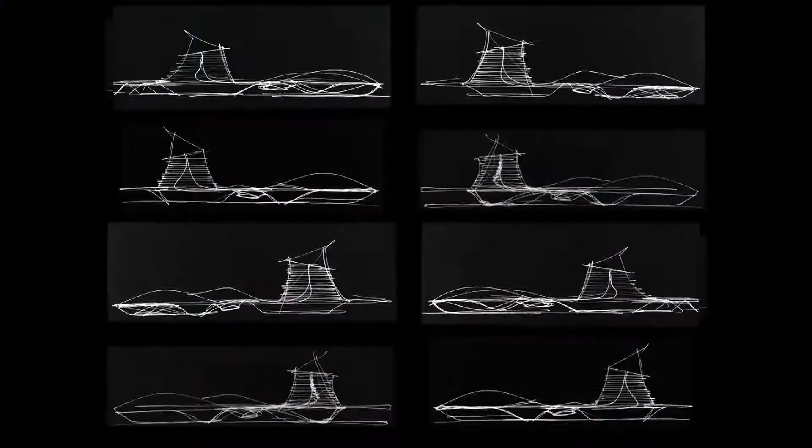The first subject here is edge making. I want to talk about the idea that in building cities we have edges, the outlying components of the city that delineate or define it. For us, projects in the office that have helped us understand and work towards producing an interesting edge condition are port terminals for cities that exist on the water.

This is a project we did in Taiwan for Keelung. The project started as these kinds of sketches for the edge of the city, and how a port terminal might be notated and terminated to produce a kind of urban condition at the very edge of the city. The building was designed to sit in strong relation to ships coming in and docking with it.

The architecture would somehow evoke the beauty, the poetry, and the power of nautical architecture in a single entity that would work in unison, musically, with the ships moving in and out of the port. The building is also a kind of celebration of urbanism at the edge of the city.

In this case, we produced a sports complex, a velodrome for cycling events and other things, so it wouldn't just be a functional building at the edge as a port, but also a public building, a spectacle building, a building of events and structures, so people could arrive and have a kind of affection for it, an understanding of it as part of their city and part of their existence.

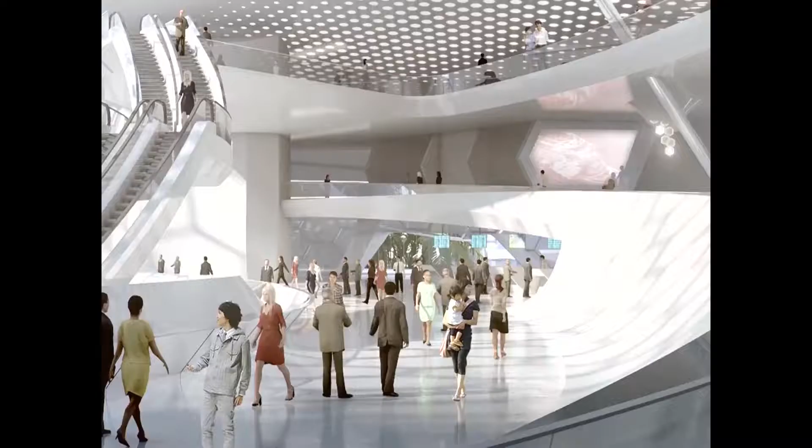Inside the building, the public street winds straight into this facility. You can see in this image that on your left is the circulation system that moves through the building to take people on a functional level in and out of the port.

On the right is a public street full of art galleries, some retail, but mostly cultural institutions, producing a kind of living, spiraling urbanism that goes up into this building and moves around through its interior. On the upper level, this is the actual waiting hall, which looks into the city.

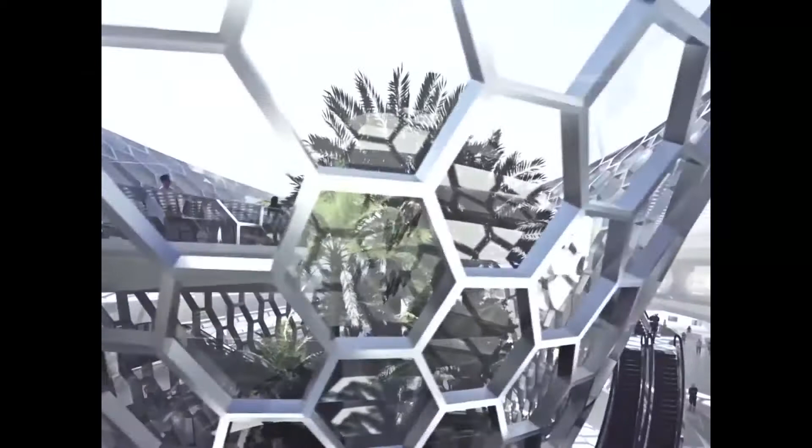The city is extracted and brought into the building. At the very center is a massive space, about this size, that is in fact a tropical rainforest, placed in the interior both as a reminder that Keelung is surrounded by tropical rainforests, and as a natural cooling system, doing what nature does best: cooling and oxygenating air and driving that into the building.

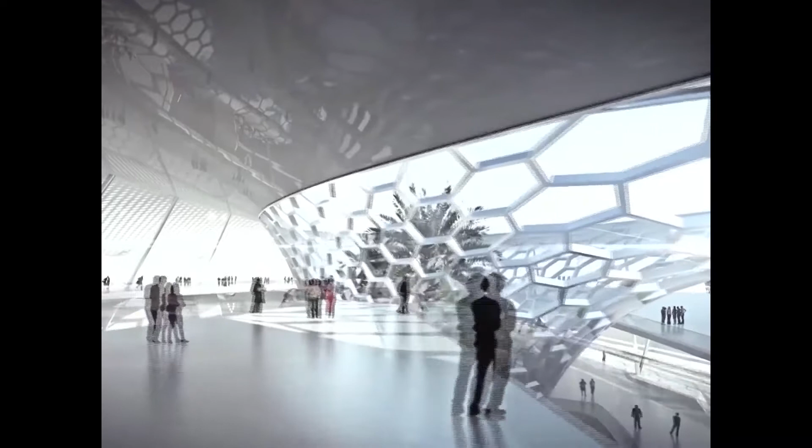You see the relationship between the functional aspects of the building, the atrium and the tropical rainforest, and the actual machining of the building. All of this produces a very functional, important building for Keelung that's not only a transit center for moving back and forth on ships, but also a place to celebrate the city's urbanism.

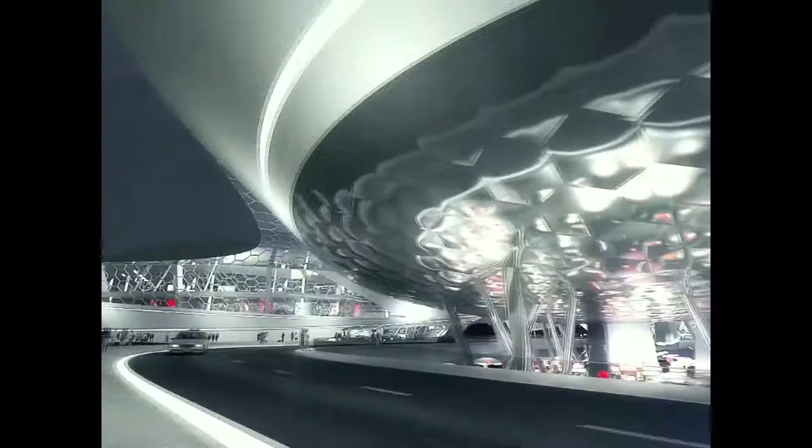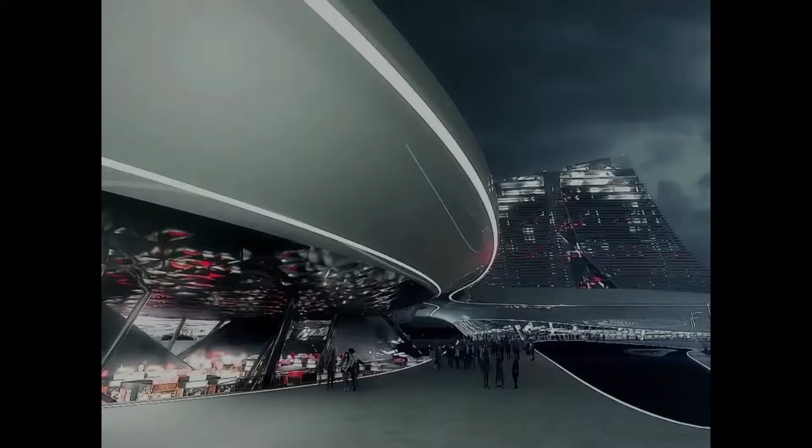At the ground level, there's also a celebration of urbanism: what is by day a parking structure becomes by night a night market and a very active area under the velodrome. Here you can see the relationship of the city to the building—the building is lifted, the city slips under it, through it, and activates the underbelly.

Then there's the interior botanical garden, a sort of tropical rainforest. Here you can see it from the top, and the relationship of that aspect of the building to the rest of the architecture—it becomes a sort of central point.

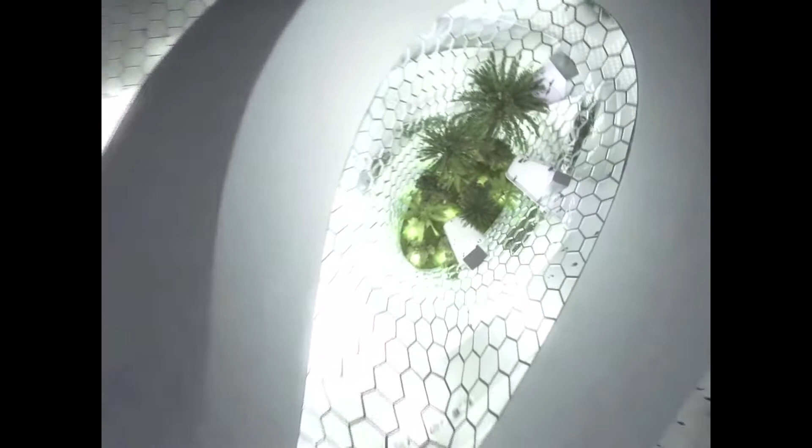The building itself produces a kind of iconic presence in the city of Keelung, with rooftop restaurants and clubs and so on that look out over the harbor.

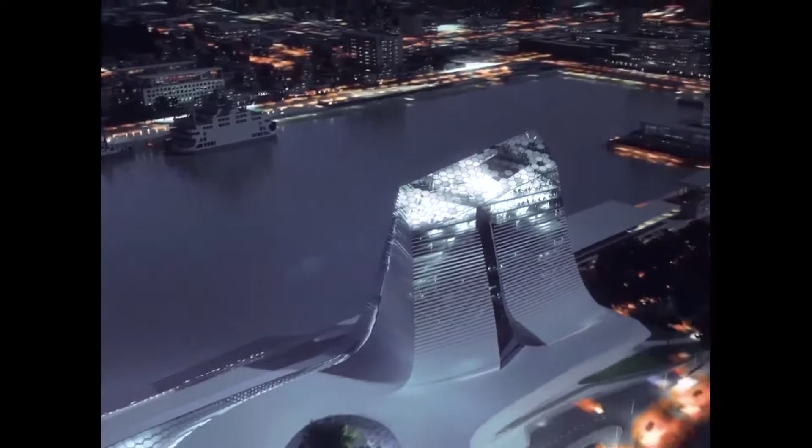So the building covers urbanism and edging urbanism on three important points: one, it's a public building with public functions, not just a utilitarian building; it has an architectural assembly and poetry about it unique to the place; and it has a kind of iconic presence in the city, becoming a kind of gateway.

Similarly, we're doing another port terminal in Miami, which is of course very different than Taiwan. Here the strategy was similar in some respects, producing a kind of iconic edge building, but also playing up something more in the American context, more to do with Miami.

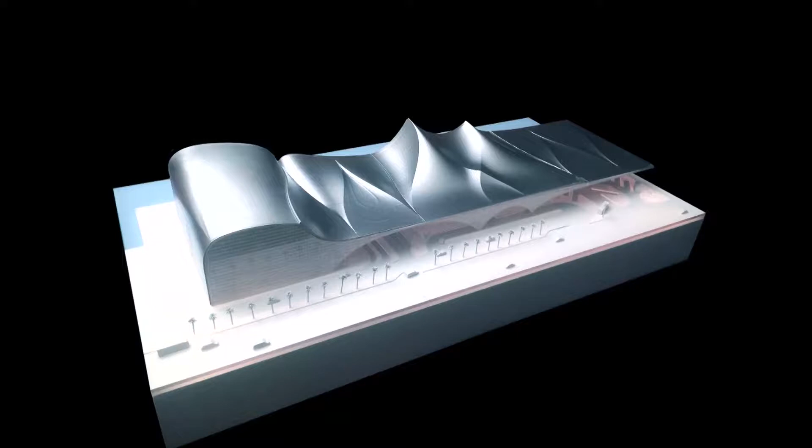Miami is a place of different sorts of worships, so this becomes a different kind of architecture for that edge condition—a different kind of edge. Whereas in Taiwan it was more nationalistic, about moving people back and forth through Taiwan and China, this is more touristic, a building for a big shipping company that produces tours.

This is the roofscape of the building. The roof is based on the mathematics, and again the poetry, of the movement of liquid and seascapes, evoking that sort of poetry. It's also similar to sand dunes, which act the same way as water does mathematically.

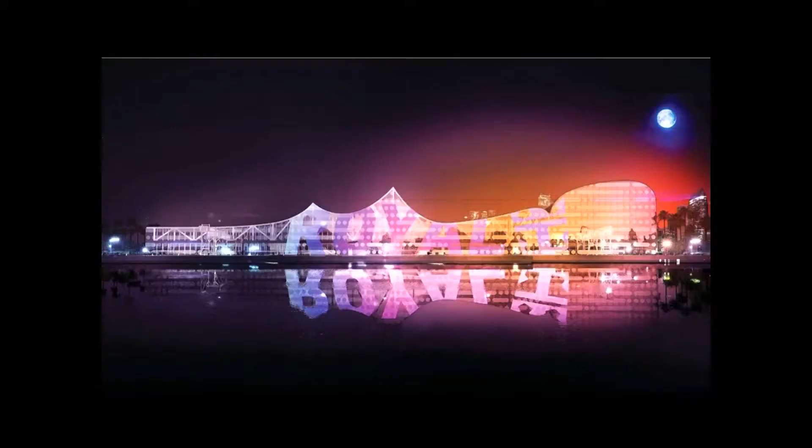Here you see the building edge. A key part of this building was the spectacle aspect, since it's more of an entertainment, tourist-driven architecture. The idea was to play up a live facade that would continually light and change according to the branding of Royal Caribbean Cruise Lines, producing a constant changing set of effects on the edge of Miami.

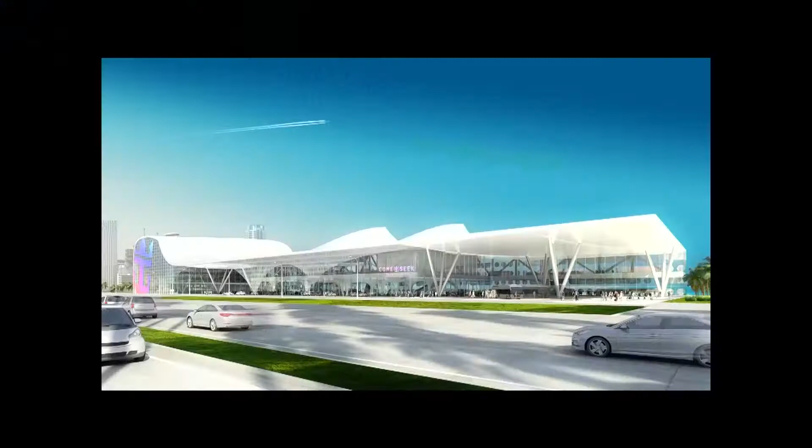This building is very much a celebration on the water side. On the city side, it acts more functionally in terms of tourism and people moving back and forth. It doesn't open up the way the Taiwan project does into an urban park at the edge, but rather cleans up the edge functionally. Here you see the areas for how these cruise terminals have to function, much like airports.

And then the sort of logic of the building itself is this outlay of the facade you just saw, the actual structural system that holds this mathematically complex roof, the interior halls, and then the other utilitarian aspects of the building on the functioning side. And again, the hall here is a celebration of public space.

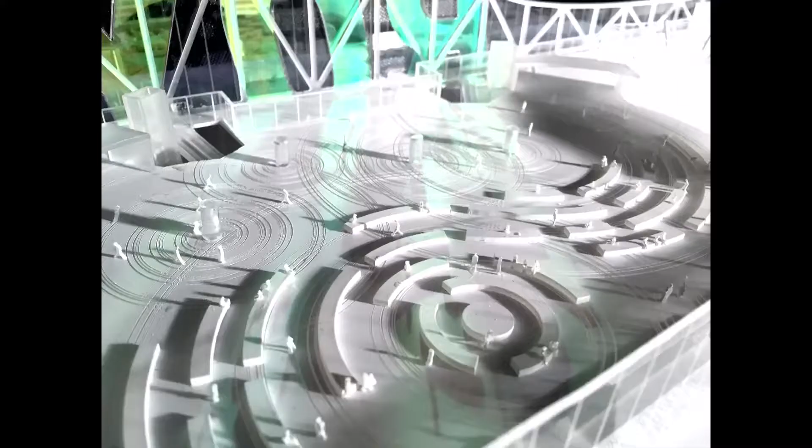I think what's important to think about when designing buildings for cities is that cities exist for buildings in a way, and that buildings themselves need to somehow become a kind of encapsulated or contained urbanism. The more we think of public space, both outside and inside, as having a kind of symbiotic relationship, the better off our cities are and the better off our architecture is.

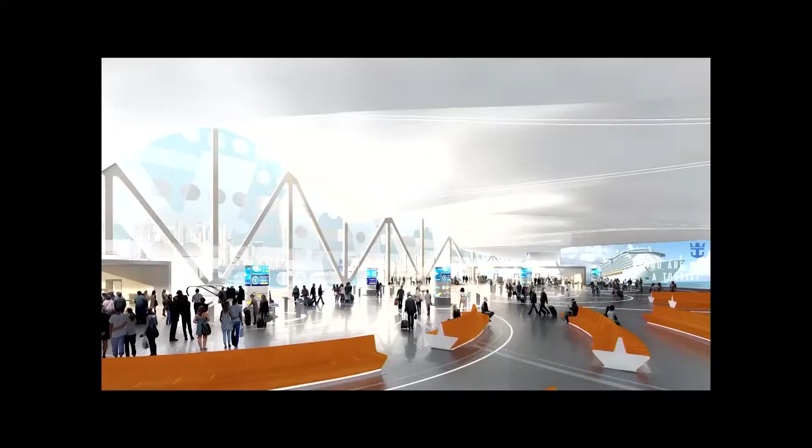So this is the interior urbanism of the transit hall of the Miami Port Terminal. And this is the lower level of that building. And so these become sort of celebratory, awe-inspiring spaces.

One of the things I was very obsessed with in designing this building and the previous one was the romance of moving through gateways at the edges of cities, the idea of leaving a city or coming into a city, much like your airport here or any major airport in the world.

These are important places, both as the first things you see when you land somewhere, of course. They're the calling card of the city, but they're also remarkably important places when you leave. And we've sort of lost that with the design of these kinds of buildings centered around retail and shopping centers and efficiency and security. Many things have had an impact on that.

And this is a 21st century terminal. It's not an airport, but at least for shipping, which has all the same security issues and drivers, but with a desire to make human, urban, exciting environments.

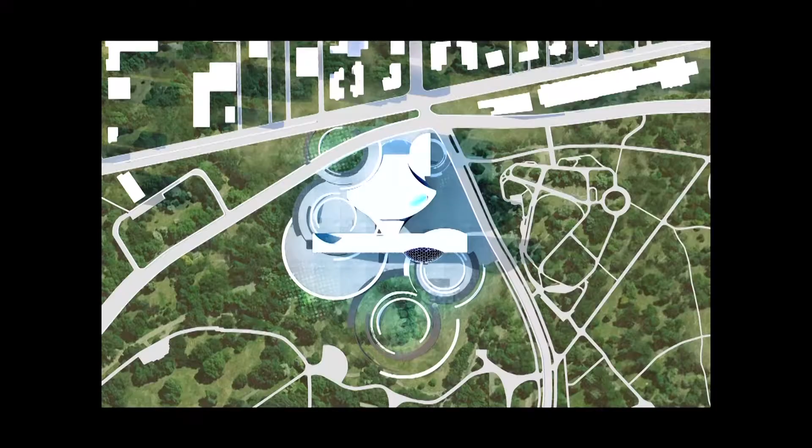Cultural identity is the second thing I think is important when it comes to thinking about cities as being humanized. Cities have to have, and are, cultural entities in and of themselves. Cities are culture, and culture is derived out of cities.

But museums tend to be, at least in Europe and everywhere now, the cathedrals and houses of worship of our time. We produce museums in all major cities. There's a remarkable one by Jean Nouvel just finished in Abu Dhabi. There are, of course, other museums. One thinks of the Pompidou in Paris, or the Met in New York, or the MoMA.

So every city has a kind of museum, and this is Budapest, designed for a modern art museum in Budapest. The park, which is a different kind of edge in cities, is the location for this project. So placing a cultural building on that interior or secondary layer of edge, being the park, urbanism was key to this project.

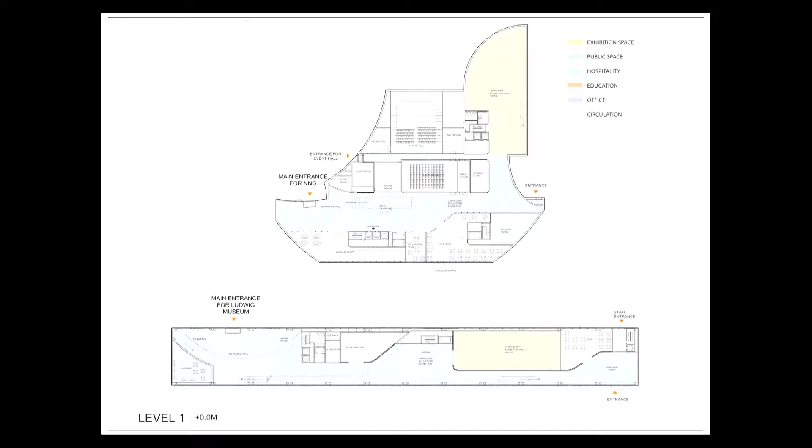Here you see the early models of the buildings. It's a historic museum in the front for the history of Hungarian art, and then a contemporary art center on the park itself, the way we had divided it in our scheme. This is the planning, the contemporary art center here, and the more traditional museum spaces in the first building, with the connection of these two buildings across the park.

And the circulation system gets you from the museum on the urban side, the city side, and takes you out to the park side where there's the contemporary art center. So in studying the elevations and the architecture, the idea of building a powerful statement that is part of the human condition of the city was key here.

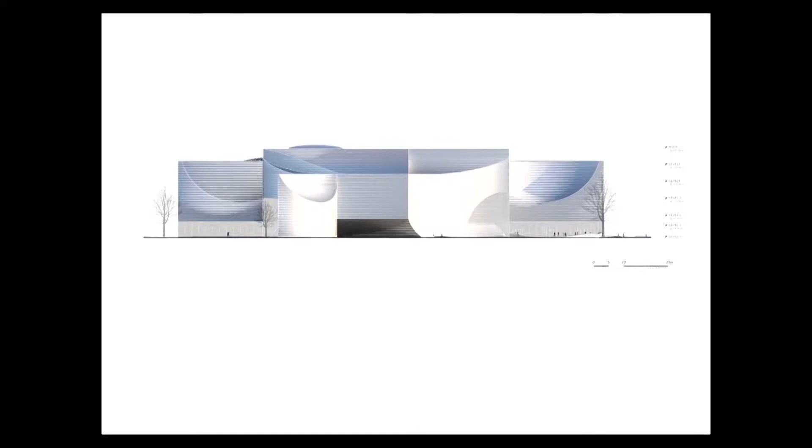So on the park side is almost a mirrored building that takes nature and deforms it into certain beautiful structures and artistic aspects. And on the city side is more of a volumetric architecture, which plays off in a very contemporary way the historic aspects of the city of Budapest, which is a very beautiful city, much like Vienna.

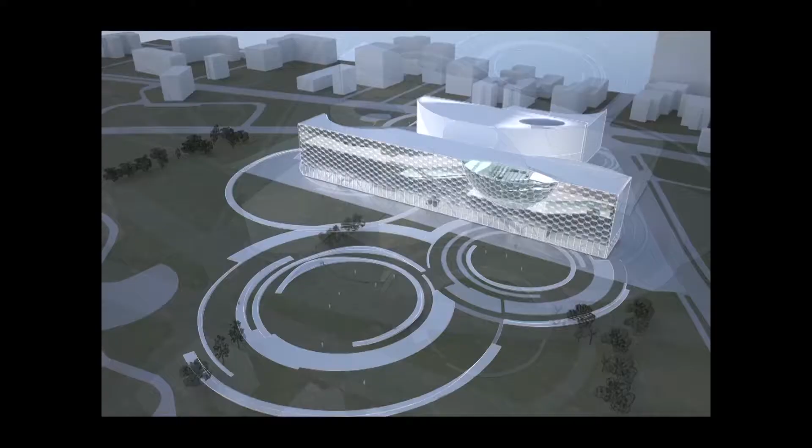Here you see the city side of the building, the entrance to the museum itself, the various aspects of the museum, the galleries, the public halls, the public spaces, all articulated on the street facade. And then on the park side, along with the landscaping, this more abstract, ethereal, almost atmosphere-like building on that side.

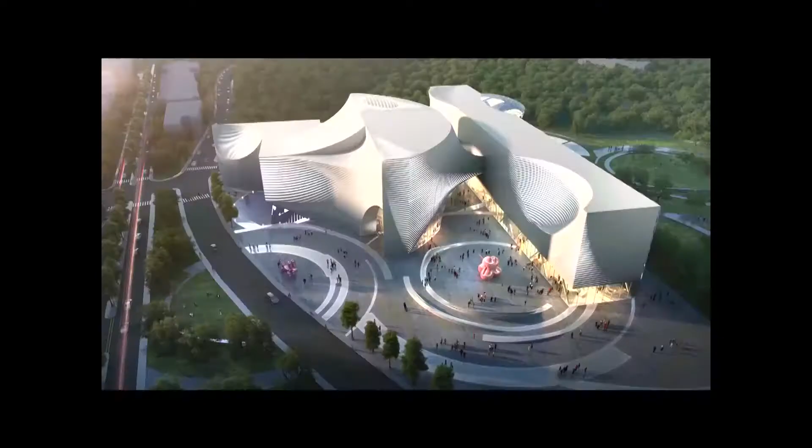The actual quality of the architecture there, the spill out of the park into the lower aspects of the Contemporary Art Center, the museum above, the theater hanging over the park, and the combination and sort of music of this building sitting within the park setting and within the Budapest setting. It becomes a highly sculptural, highly articulated building, but a building of note in the sense that it's recognizable as the Contemporary Art Center for Budapest and Hungary, with status as a top-tier museum on the world map.

At the moment we're also building this building in Russia for the Hermitage Museum. The Hermitage, as you might know, is located in St. Petersburg. They have a pretty interesting and substantial modern art collection, which they've rarely shown, which they'll be bringing to Moscow and housing in our building. The idea is to build a state-of-the-art contemporary museum for Moscow.

This was the first sketch for the building, and in a way, in producing a kind of cultural icon or magnet in the city, a sort of modern cathedral you could say, the thought was to play off some of the Russian history in modern art. In fact, El Lissitzky's Proun spaces were a big part of this idea.

The aim was to produce a highly functional museum with extremely functional galleries and spaces that curators and visitors would really enjoy and be comfortable in, but at the same time produce a spectacular architectural feature. In the history of contemporary museums and cities, there's always been a bit of a disjunctive moment where they don't necessarily fit the context or what's expected.

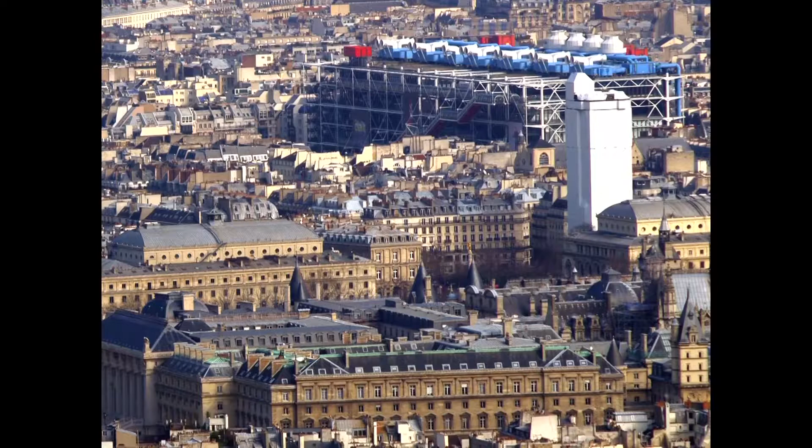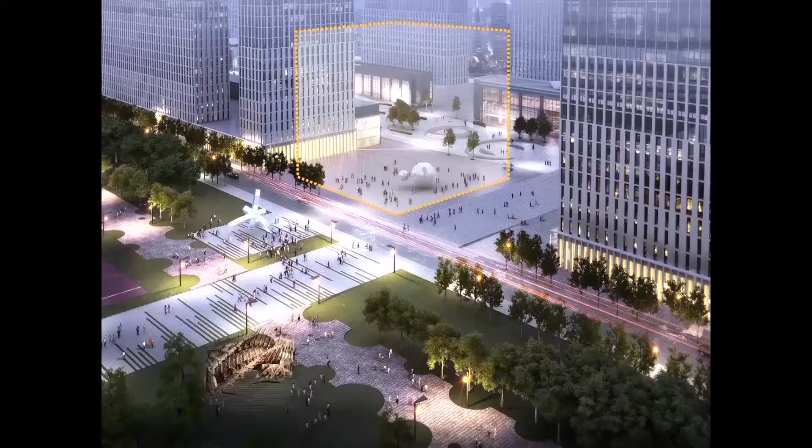This very famous project by Piano and Rogers did just that. It almost seemed like a spaceship had landed in Paris at the time. And yet today it's probably one of the most recognizable and grafted-in aspects of Parisian urbanism one can think of. So keeping that in mind, this is the context we have in Moscow.

It's a very different context: modern buildings, a large boulevard that has an amazing history tied back to constructivist lore, because in fact it's the ZIL factory site, which the constructivists had looked at from 1919 as the place of the future. In fact, Vertov's Man with a Movie Camera was shot there—a lot of the filming was done in this ZIL area—but now it's being replaced by all of this contemporary building.

We started the museum design not necessarily thinking about doing a kind of architectural monument, but rather a phenomenological building. We started with LeWitt's works—these are Sol LeWitt's sculptures. LeWitt had done a lot of work around mathematical, Cartesian entities, both in 2D and 3D.

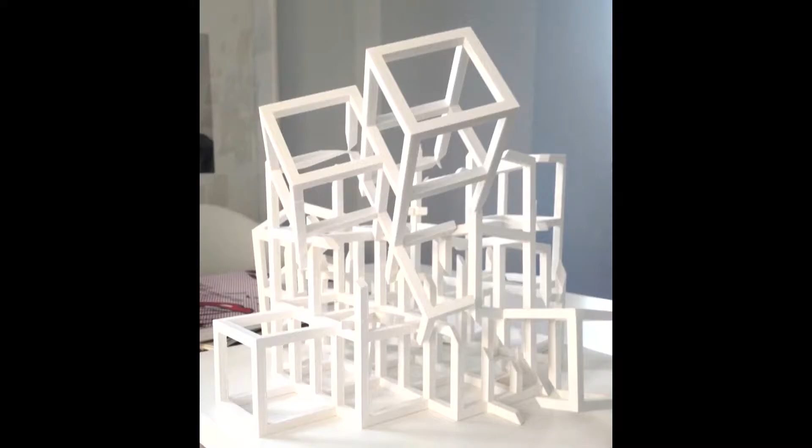We were particularly fascinated by LeWitt's plays on cubes and the mathematics of cubes. So we produced our own models in the office, taking apart LeWitt's work and trying to understand how we could produce a link between LeWitt and the constructivists, to create a playful, lyrical architectural assembly.

The building, again because of this mandate to be at once highly functional but also highly impacting visually and spatially, began to be planned this way. It began with a number of wings for contemporary art. What you're seeing here is the wings stacked, the lower wings being modern art, the higher ones being contemporary and experimental art and so on.

That allowed us to really start looking carefully at how galleries could be created to contain the work, but then the interface between those galleries became the key thing to making the architecture important. So the circulation system in this building acts a bit like a Proun space—it moves in what we call the Z direction.

There's no atrium as you have, say, in the Guggenheim in New York, or even the Guggenheim Abu Dhabi as planned by Frank Gehry. Rather, the circulation is through the galleries themselves, like a thread that takes you up through the building. In fact, we designed this building based on time, not space. We decided to work on a museum that would take a certain average amount of time, and we designed the entire experience around that timeline.

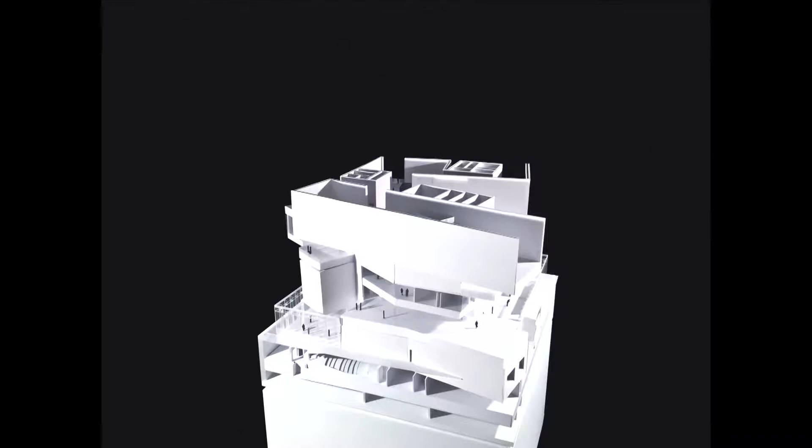As you go up to the second level, there's the Hermitage head offices and pedagogical center and so on. Then we get to the modern art galleries on the third floor, designed around the modern collection of the Hermitage, which dates from 1864 to 1919. Then we have the contemporary art spaces above that, 12-meter high spaces for showing contemporary art, and then experimental video and electronic art above that.

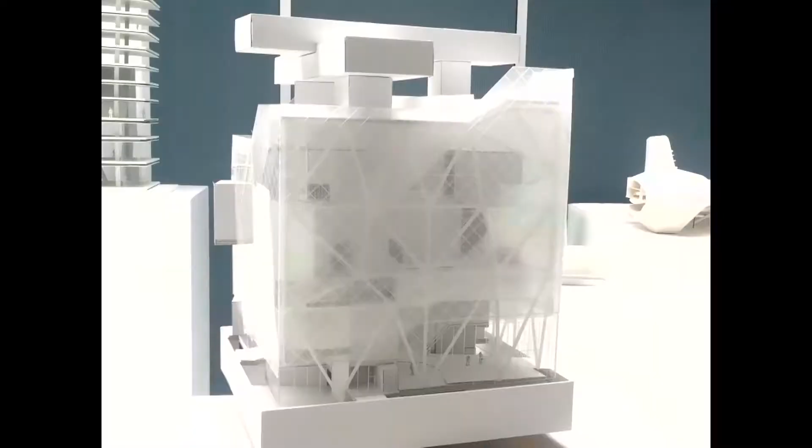The building is encased in a structural system that helps hold up all these cantilevered volumes, capped with my little ode to Malevich, which is really the heating and ventilation systems hovering above the top of the building. So here you have a sense of what we get, because the idea was that the building is really a kind of urban entity that allows the city to be pulled into its internal organs.

The facade itself is a double skin of glass that becomes a thermal barrier, helping cool the building in summer and heat it in winter. But it also produces a set of optical effects with the existing galleries inside, creating this kind of crystalline, somewhat mystical, atmosphere-like facade.

This is the kind of power we want from this building: it's under a constant state of change. The spectacle here is not necessarily formalism and architectural bravado, but rather a kind of phenomenological set of occurrences with light, space, and occupancy, because as the building changes its occupancy, it also changes its skin.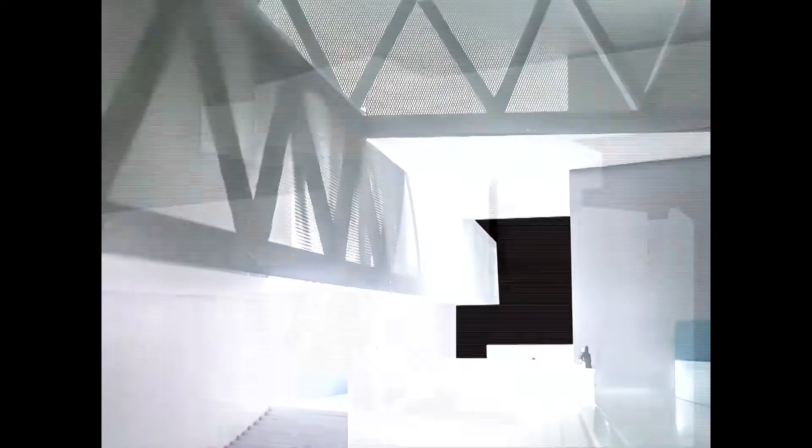Here you see the ground floor and the roof, which is the place where the mechanical systems are turned into a kind of sculptural entity above. And here's the experience on the roofscape of the sculpture garden.

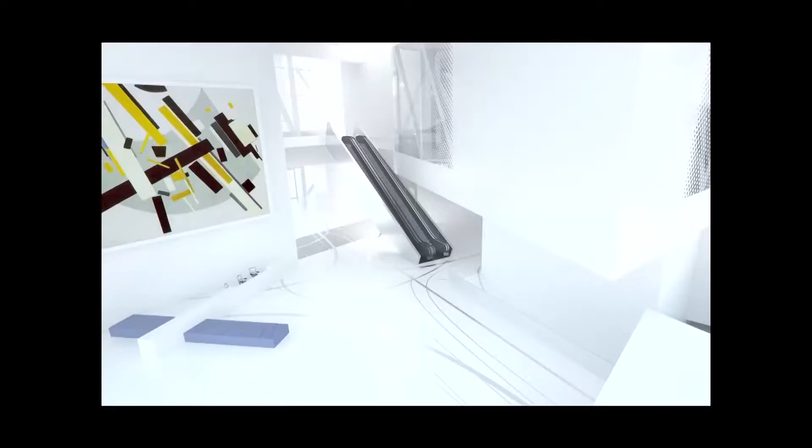The interior spaces move from the lobby up to the pedagogical center, then you take the escalator on the right or left to go up to the galleries. The ground floor is a kind of urban space again, becoming this powerful entry and location in the Moscow context for encounters, for meetings, for public realm. It's as secure-free a zone as we can possibly get in the current climate.

And then some of the details. This is what I affectionately call the anatomical theater, a sort of public voice theater on the corner of the building that is open to the public to give speeches and see performances. It's not part of the admission to the museum, but is in fact in the public realm.

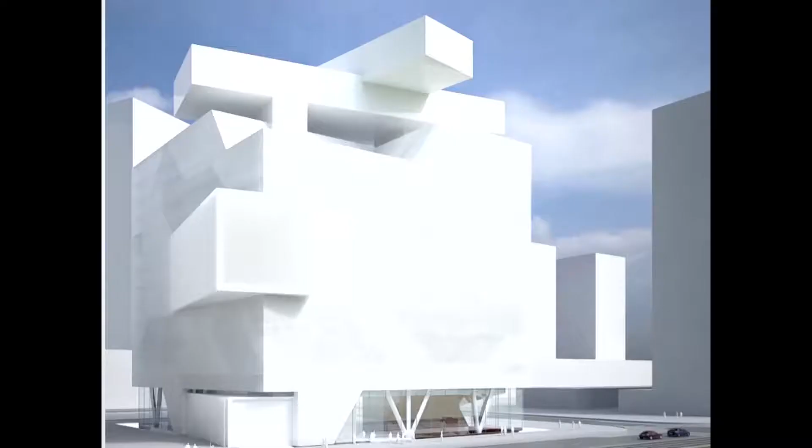On the city side, you can see the way the building sits on the boulevard. We did so many simulations of this building under different lighting conditions, and one I found fascinating is that when the sun shines in Moscow, which isn't that often, there's a reflectivity off the building producing almost a transparent quality. So the building goes from being opaque in the city to almost transparent, through different phases and qualities of atmosphere, light, and weather.

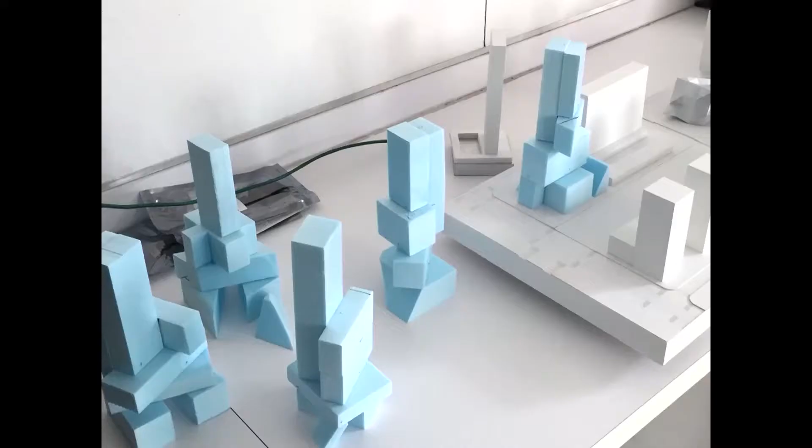Next, form—the idea of giving form to the city. Form is very important for us as architects, but also important for the city as a way to see itself as urbanism. This is another project in Moscow that we're doing, a tower. It's near the museum—in fact you can see the museum just over there on the right in this conceptual model.

This project for a tower addresses the usual problem in cities, where we build towers almost as if they're statements of developers and their egos. But we wanted to harken back to the history of this site, to this industrialization, the early industrial revolution for Russia, and started working on these volumes that are very sculptural, highly articulated and quite robust.

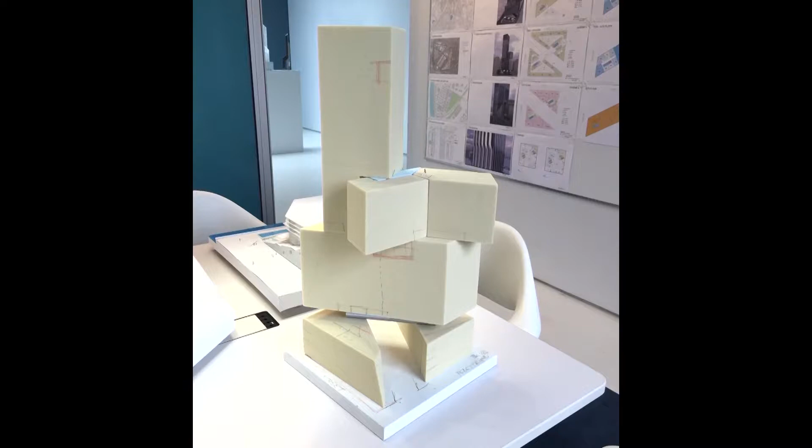This was actually the first model for the tower, a residential tower on the ZIL property. As we worked on it through many iterations, we began to fine-tune it to have more of a machinistic quality, almost like a tooled instrument, bringing this idea of a cube up above the horizon line in Moscow, as a kind of homage to constructivism.

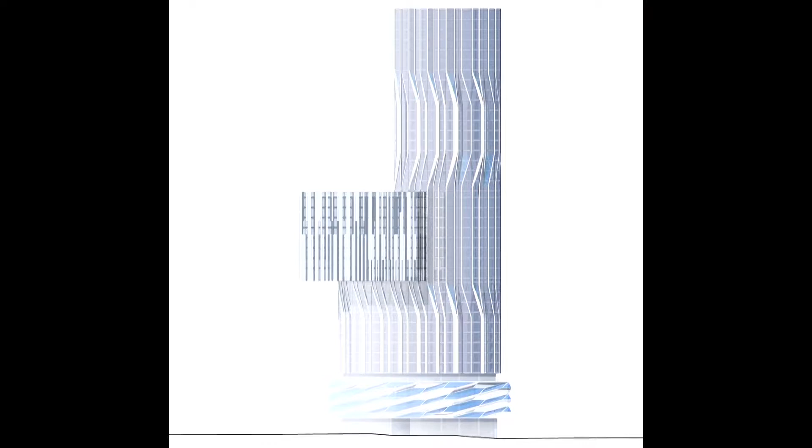So these are the elevations for the tower. The tower has this fluted architecture, which plays off the light and qualities of the Moscow skyline or atmosphere, and you can see it here in different moments.

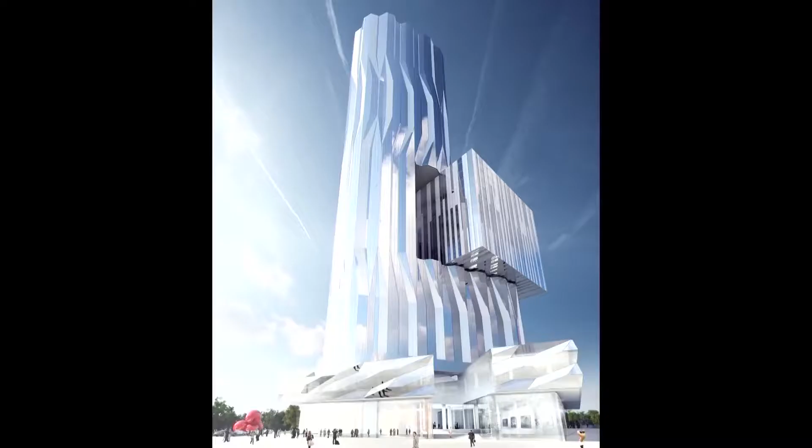This building was very important for us, that we could find a way to pick up on the historic aspects of this particular place in Moscow—this highly industrialized site that made machines and tools and automobiles and machinery throughout the 20th century—and produce not a sculptural statement, but a sort of poetic mathematical statement around that subject.

In Abu Dhabi, we also did a tower a few years ago on Al Raha Beach. For that project we used a very early parametric modeling tool—this project is now already 8 years old. This tool allowed us to think of the building as a sort of evolutionary building in terms of what the program could drive it to become, with the dimensions of floor plates and the architecture being the result of a mathematical operation on the massing.

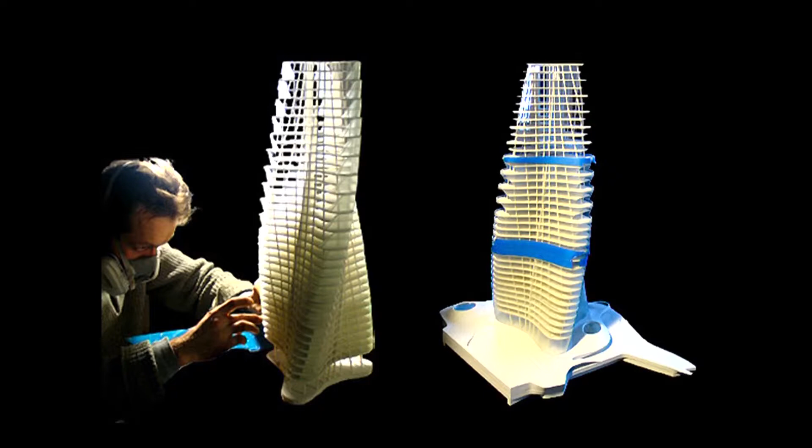The Al Raha Tower in Abu Dhabi was designed with a mandate to give Abu Dhabi something like the Burj Al Arab in Dubai. We thought we should change this strategy. The Burj in Dubai is a good building, however the metaphor of the sail, with the image of the building being very much about one particular thing, we thought should be much more abstract—that the building should speak more about the culture and the place, the phenomena, and again the DNA of place. So these are the studies of our models for this tower.

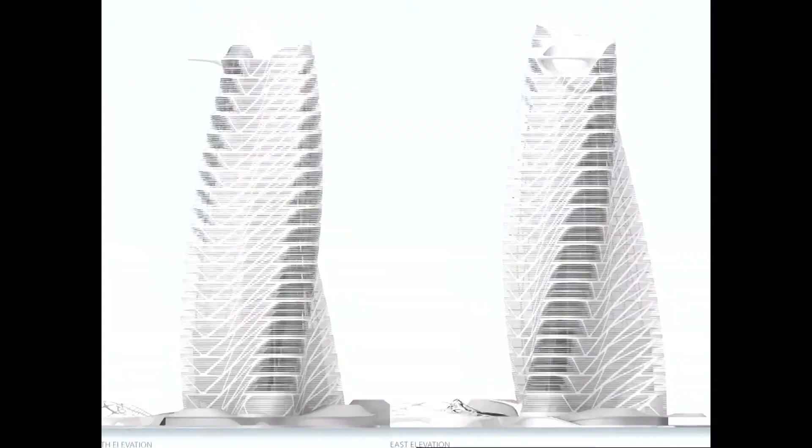And this is the Al Raha Tower. The tower is actually very, very beautiful as a result of some of the things we had done to it. It's a series of double-story apartments, but we had looked at the context and the history in Abu Dhabi and this part of the world.

We looked at clothing, at structures and early tent structures, things that would fend off the heat, to produce a building that is almost working with the wind and the sea air—like the port terminal building—to be a sort of symbiotic building with the local context.

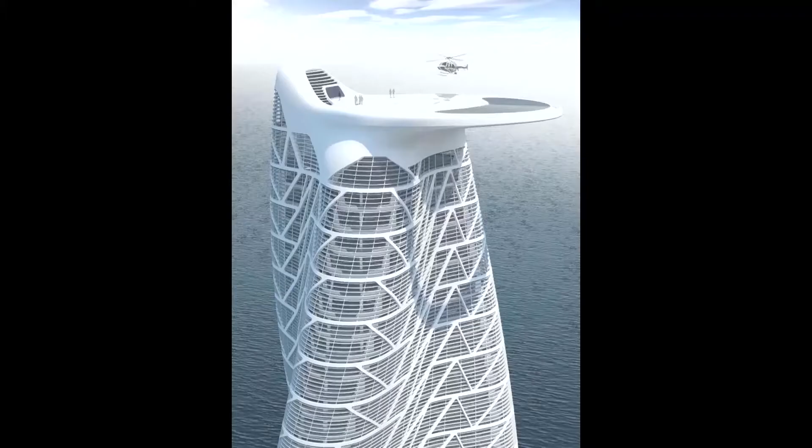The program called for a double helicopter pad on the roof, which was a big problem in the design because we wanted something very elegant and singular. But going through a lot of work on this, we realized we could make it part of the quality of the building as it meets the sky, producing a second horizon line and having it sit on the sea in a very powerful way. So the architecture of the roof itself had to be designed as one monocoque piece, because it had to be helicoptered in to cap the building due to the military lines.

And it also becomes a sort of beautiful, pearl-like cap to this building. We stayed away from the cliché finishing of buildings with things that harken back to the Italian Renaissance, even in Asia, or things that are too symbolic. So to really produce an abstract building that stays abstract and allows people to have their own readings going into the future is key to part of what I'd call a city's humanity.

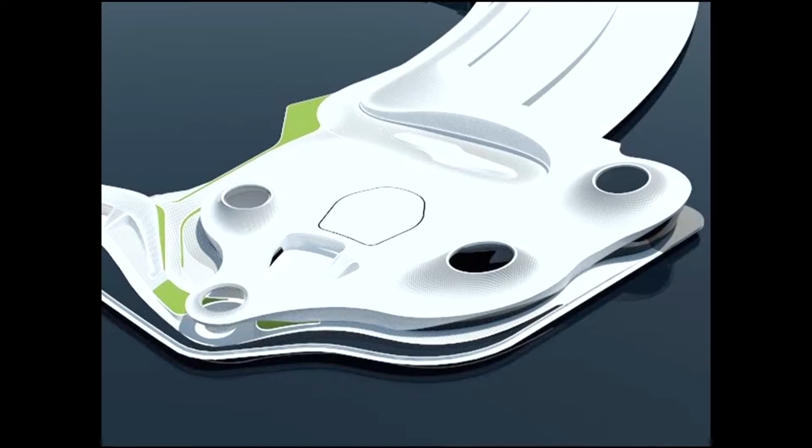The base of the building picks up on the seascape and landscape to produce these aerated spaces for the spas, restaurants, and various other pieces. You can see how the building sits directly on that and is part of the waterscape. Here again is a different definition of edge, not urbanism and public, but private, yet still powerfully articulated and situated on its condition, acting in concert with its ground. This is key to all buildings—they have to be very cognizant of how they meet the city. And this is the interior space of this building.

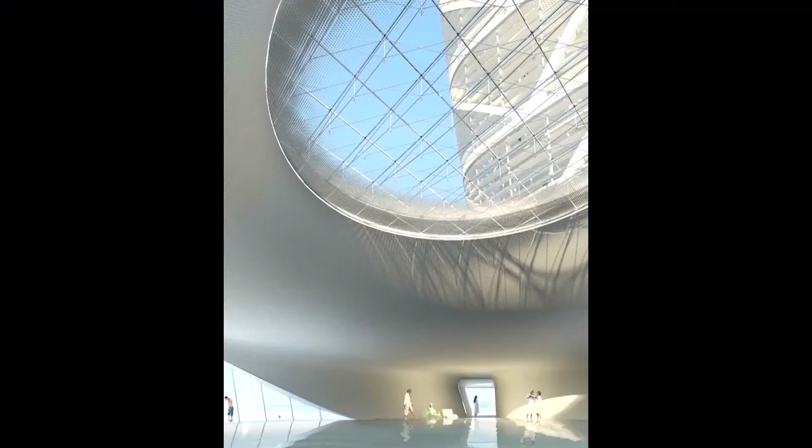Placemaking is the next subject. This is really the idea of looking at the edges of cities and how they're articulated in public, looking at how we produce cultural items within the city, or icons, or places of attraction, and then places that act in a very public way to produce active conditions and places.

In our case, again in Abu Dhabi, we were commissioned to do the hotel centered on the Formula One track for the Yas Marina circuit. Our first inclination, to do a building centered around speed and movement and the poetry, or the artistry, of Formula One, was to look at some things like this.

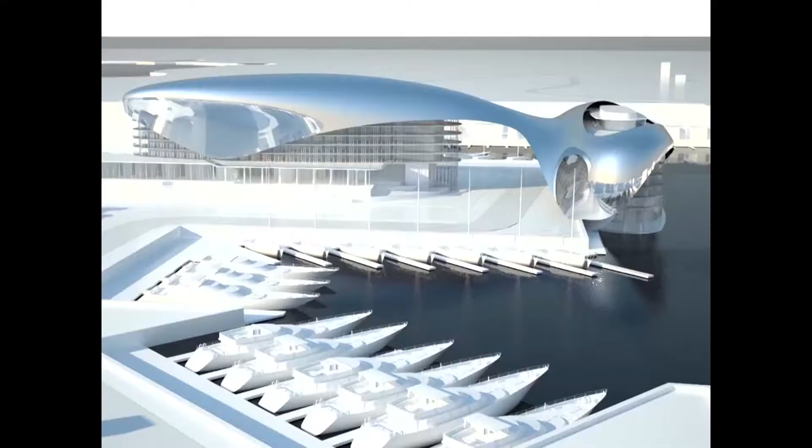That became a kind of idea for building a building—could the building evoke that quality of being a poetic gesture towards the very thing being celebrated as a place, as making a place? So our first sketches for the Yas Hotel, for the Yas Marina, were literally these computer drawings of pouring a mercury-like liquid over two hotel structures, crossing the two hotels into the water, into the marina, and crossing the track, producing a fluid, continuous body over the building that would evoke speed, movement, action, and the beauty of both nautical architecture and racing.

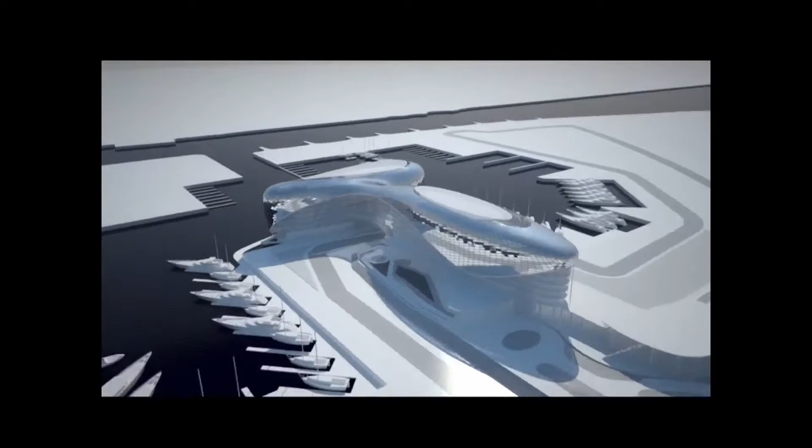This is one of our first computer drawings produced to study how this shroud, this casing, would work with light, with helicopter shots—which are seen a lot during the race—but also with environmental concerns. Because what we realized when we did this was that we were producing a kind of shading device for the building, an envelope that would be part of its environmental story. That became key to the way the architecture was articulated and designed.

So you can see here the controlling and the beginning of designing what ended up being 5,680 diamonds, which had to somehow make economic sense to build, because it would be outrageously expensive if they were all unique.

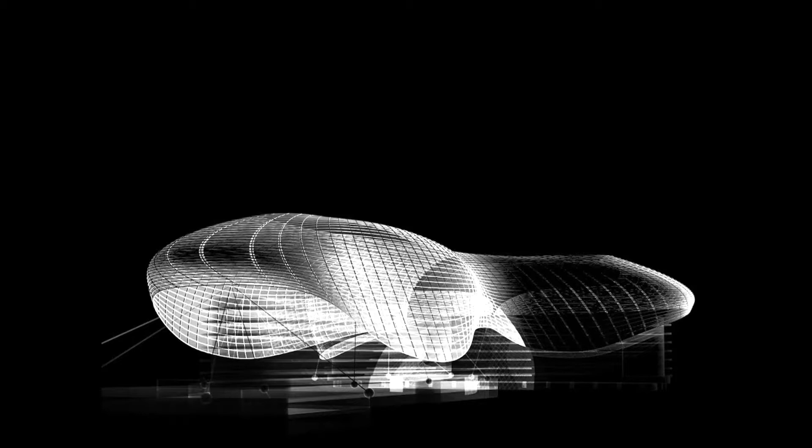We did a lot of work with parametric modeling tools and all kinds of mathematical models to see how we could produce this facade and skin at a relatively good cost, make it efficient and environmentally important. With Schlaich Bergermann, our engineers in Stuttgart, we finally ended up with this envelope, which rests on 7 points.

It produces a very beautiful and powerful architectural statement in a light and articulated way. Not many people know this, but when we started the building, there was really all land here, so part of our project was also to help design and dredge the marina, and to have all of this done in under 21 months. In fact, the whole building was built from our design drawings to completion in 18 months.

Here you can see along the way the construction of the dredging, the marina itself, the locating of the building, the construction of the grid shell as we call it, and all the panels being put in. That gives you a sense of scale of how large this envelope is, and how it sits in relation to the building.

Every vertice, every moment of the diamond, has one of these strange-looking things on it, and there were two reasons for this. One was when I originally designed these moments of the glass, my intention was that the glass would all move a little bit when the cars raced by.

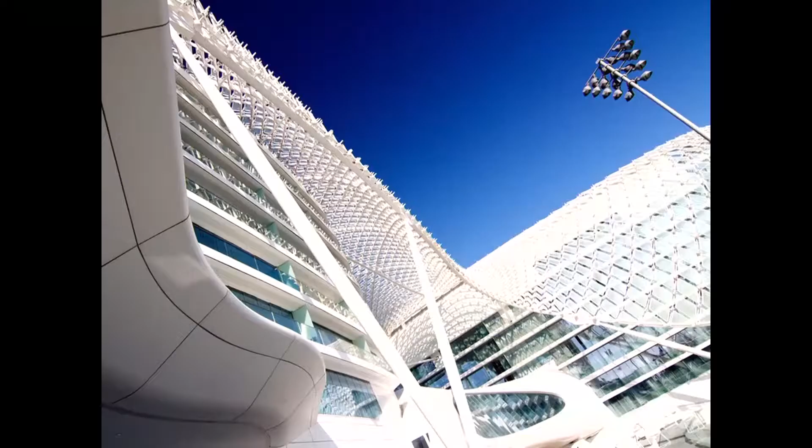Here you can see some of the other images of it, and the moment of the turn of the cars through these 2 loops. And here you can see the facade as it changes in color and light throughout the night, because as the lighting of the sky starts to change, the computers kick in and digital files start getting sent over the facade as a kind of atmospheric envelope that lights up the building.

Another building in the same spirit of making place, but also environmental sensitivity, was our proposal for the Dubai Expo, the main pavilion at the Dubai 2020 Expo. This building is designed around the mathematics and architecture of a shell, found in all aspects of nature, and then a series of landscape elements that spiral up through the building, producing its interior court and interior space.

What was key to this building was a development with structural engineers, again in Stuttgart, of a solar skin, a pneumatic solar skin envelope that we're trying to develop with them for the center of the building. That central piece structurally is meant to be a highly efficient absorber of solar energy as well as a transmitter of light, and that's really the idea behind it.

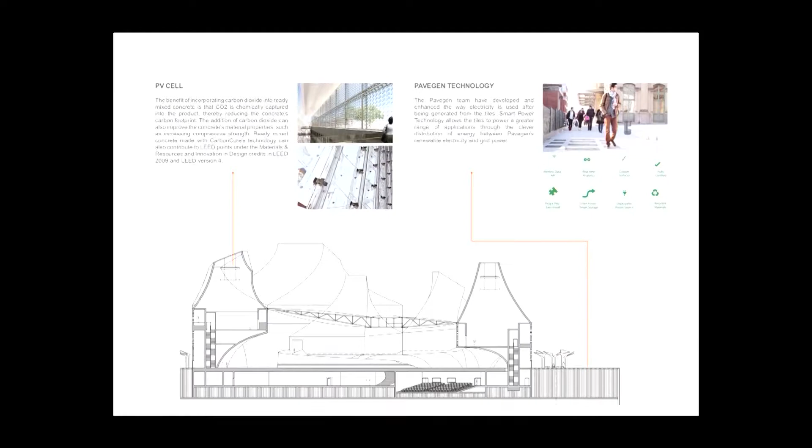So you can see here the PV panels, but also all the paving was designed to be energy efficient, energy-driven paving. People walking on it produces electricity and energy. Then all the groundscape would bring up this cool air from the cisterns below the building and produce public fountains and public spaces, naturally ventilated and naturally cooled air-conditioned environments without any energy cost whatsoever, just by moving water in the ground the way it's been done forever.

And finally, the last project to talk about is this idea of visionary planning. So to bring all of those aspects together into a master plan and into city design was something that we decided to try and put into effect here.

We worked on a project in Changsha, China. As you know, China is developing very fast, building cities at a rapid pace, but also has serious problems with pollution, congestion, population, and so on. So the idea here right away was to produce an energy sustainable, energy efficient place of contemporary habitation and contemporary urbanism, and to do that as a kind of prototype for China that could become much larger.

And the proposal that's been made to Changsha is that this city in the Hunan province, because of its location and its proximity to the world, becomes an important place to produce a prototype city that could influence much larger cities.

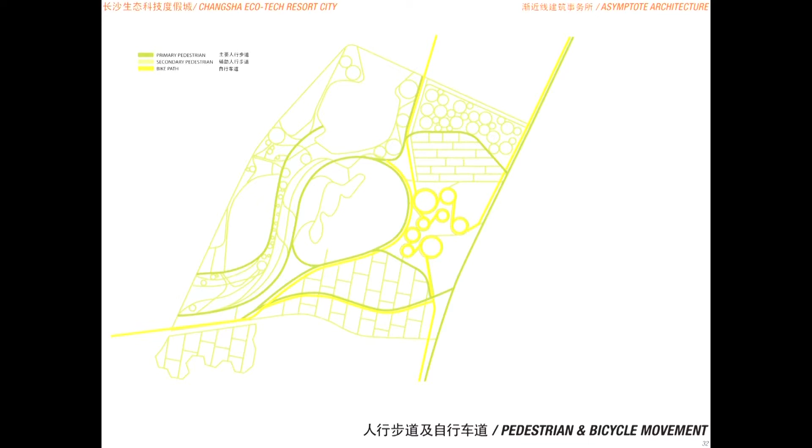So the proposal started with the idea of removing all automobiles, all fossil fuel vehicles, and producing a transport system. This harkens back to an era when we used to look at these as a potential way around the problem. In this case, what makes hyperloops and monorail systems more efficient now is that auto drive computing and artificial intelligence have changed the nature of that subject. The city plan itself, for a city of about 100,000, a small town in China, as a prototype, is centered entirely around pedestrian, bicycle, and independent automated vehicle movement.

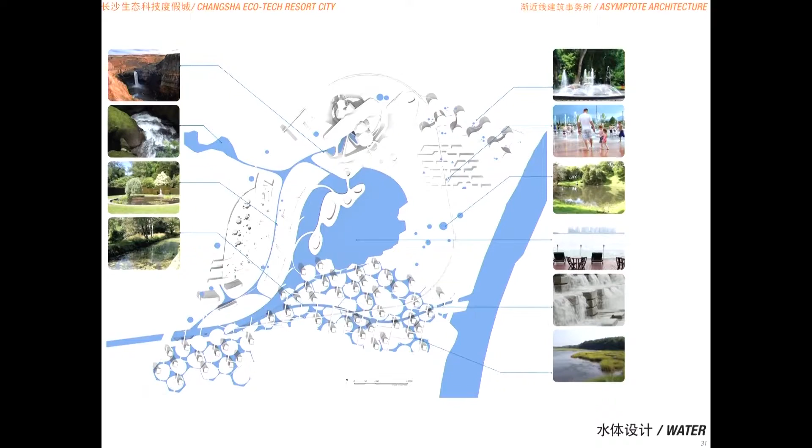And the main driver for producing the humanistic, qualitative aspects of this place is water. Water being brought in from the main rivers nearby, and then, much like in the Yas Marina, brought in to produce a series of artificial water elements. So you can see here, all the housing is placed on water islands. The recreation centers are in the main lake area, and there's a recreation center at the top, and on the upper right are offices and incubators and so on.

And then the other aspect is a planting strategy, so the entire urbanism starts with a notion about transportation and movement. Then you layer onto that the notion of oxygenation, of the aspects that water brings, both a pleasure aspect as well as a physical and visual aspect, and then parks and planting. All of that is centered around this master plan of recreational areas, a creative industrial hub, recreational zones, commercial zones, and so on.

And the key, because it's a city from zero, was to look at it a little bit like we look at designing products and technologies. So the entire subterranean of this city is a hyperloop system for the transport of goods, the removal of waste, and the movement of people. The entire circuitry under the buildings takes away a lot of the issues we have with contemporary cities, the things that make cities difficult. So all the congesting elements, all the things that have to be transported in and out, and that have to move quickly and efficiently, are put underground.

And then the buildings themselves, and we're working on two prototypes of these buildings with other clients, incorporate these ideas of personal delivery systems.

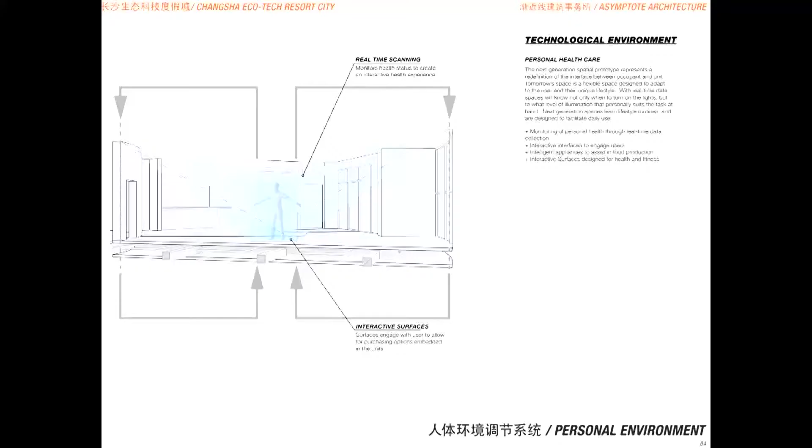So what used to be in buildings, the idea of the core and the heating and ventilation, now enters into the world of robotics, and the ability to have robots inside your buildings that will do everything from changing your light bulbs to delivering packages. It's kind of an interesting idea that you hear robots in your walls, but they'll get around it.

And then the notion of bringing interactive surfaces, again the efficiency of moving things like waste within the housing, and the housing itself is rapid prototyping, 3D printing, and prefabrication. There's an ability to sort of plug and play, where you could have a home, take it out when it's obsolete, and the new one gets plugged in, designing buildings around that.

This is the end of the talk, and the film that we produced just to show you the whole experience of this Changsha urbanism. This is it. Just let me finish this.

Maybe I can fast forward through some of this. You'll see here in the beginning, I'll let it play. Can I go forward a little bit? I don't know if I can control—oh, here it is. Let me just move past this.

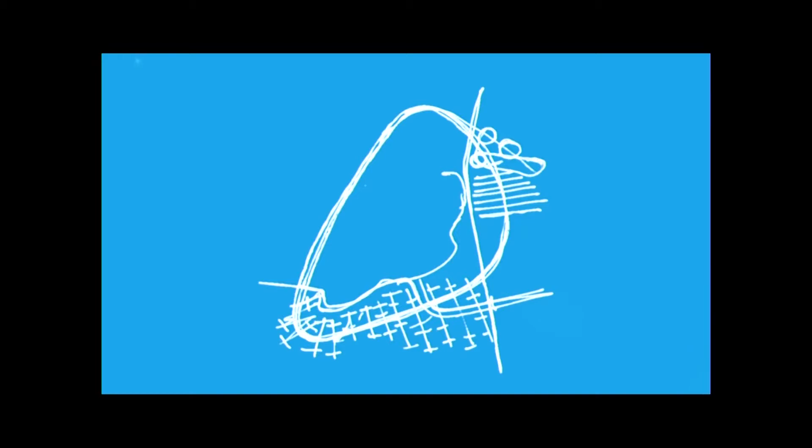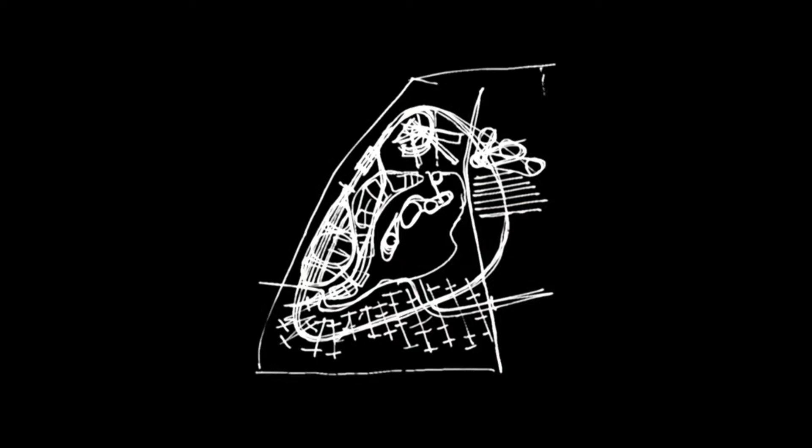So this is the sketch as we talked about it, the different zones: the housing zone, the industrial zone, retail, commercial, entertainment, and all of this being held together by a circulatory system of different levels of movement.

Let's fast forward here because I know we're running out of time. Oh, it's a PC, it doesn't want to work with me. Okay, if you have patience, we'll just let it run.

So here's the idea of the green carpet that runs through the city, the water features and elements, the various zones, the zoning of it, the different identities that the districts have according to their architectural interventions.

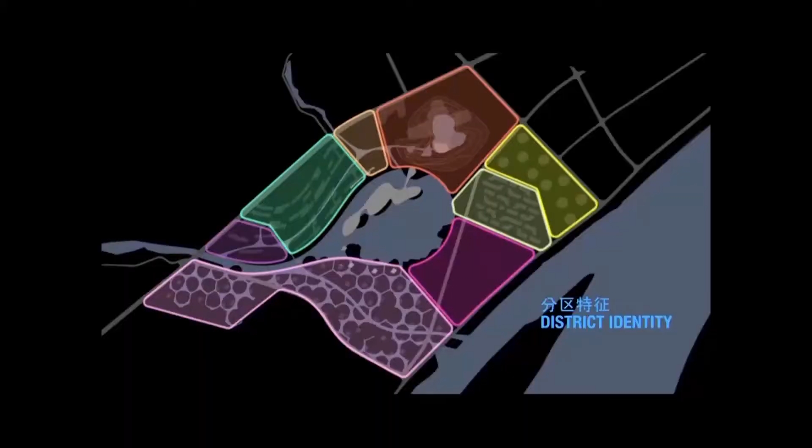You'll see in a moment the main thoroughfares that connect this city to other cities around the world, and then the actual circulation system within the city, the minor systems, and all the auto-drive mechanisms that take people from their homes to different aspects.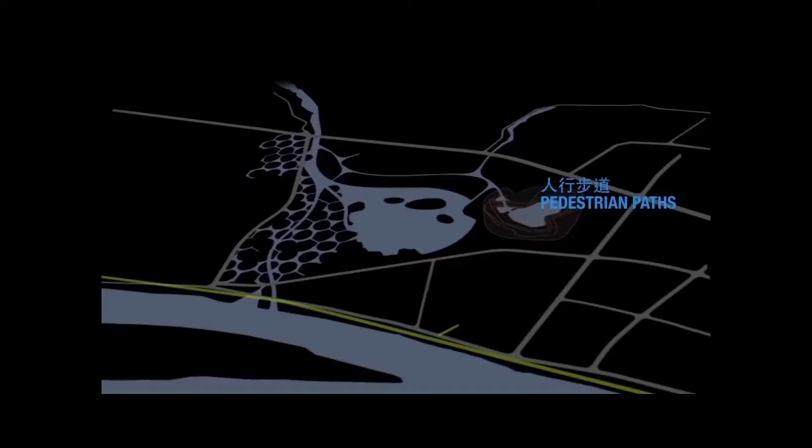And the exciting part is now. Here it goes. Just give it, because we actually get to fly through the place a little bit. We have about 5 minutes. There we see the pedestrian paths and the various pieces.

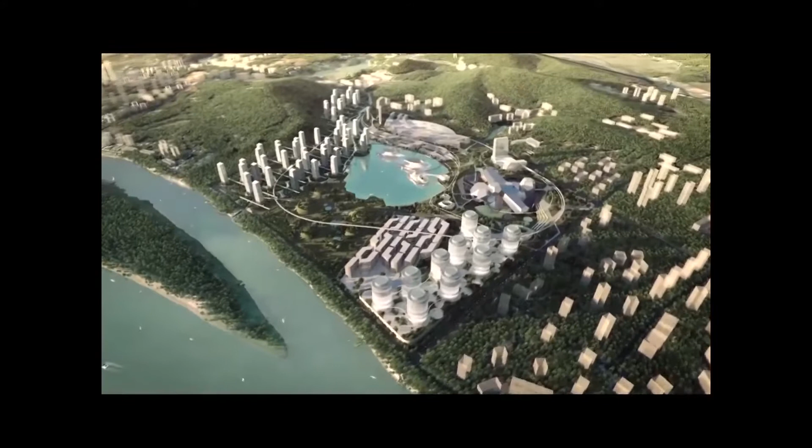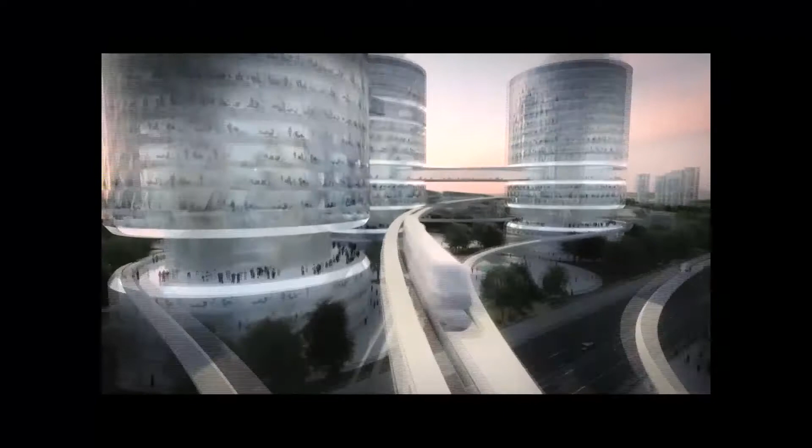So that basically is the blueprint for a carbon zero prototype city as we see it. You can see here in the three-dimensional animation the various components, and now we'll come down to where the main circulatory monorail system is running, the maglev system that connects all these buildings at this point.

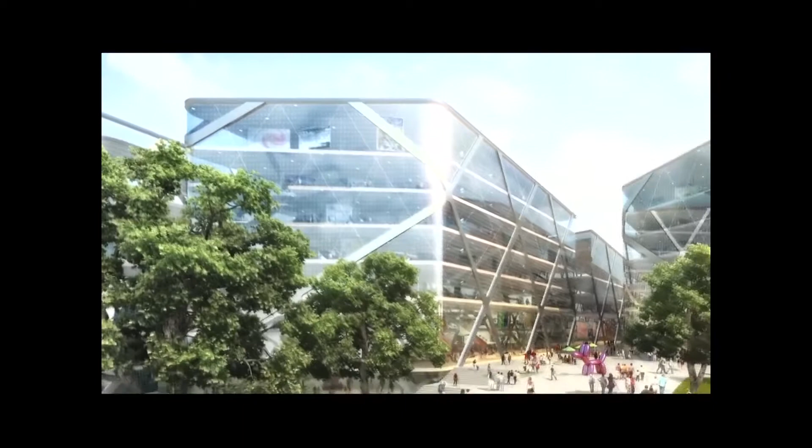You can see the smaller vehicles below, and then as we zoom out, we see the quality of the plug-and-play prefab buildings, and against these are the incubator buildings in the park. This is a little bit like a kind of computer park.

You can see the intermingling of various autonomous vehicles with parks. The interesting thing about this city is that you can see the amount of asphalt and stone that's been eliminated. In fact, it's mostly green and water.

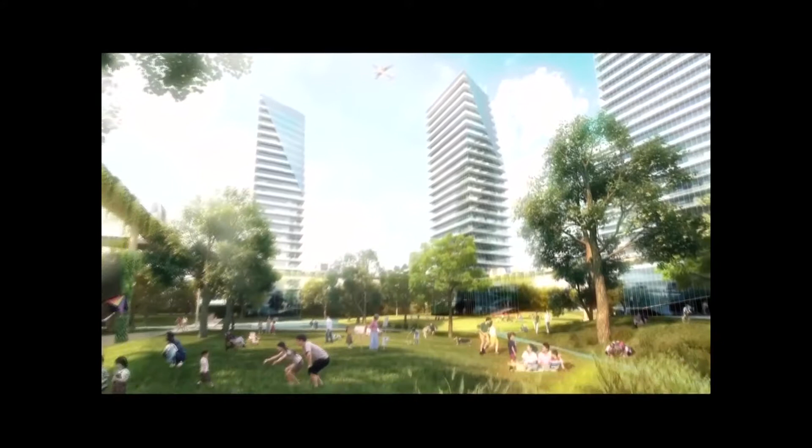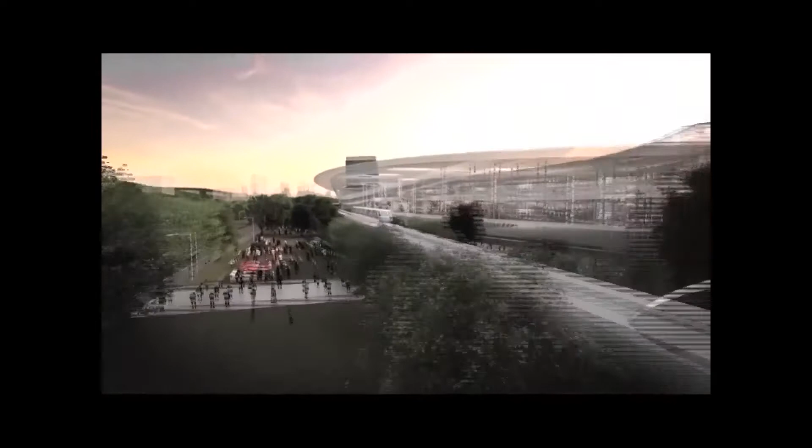So it's really the old ideal of living in nature, and nature becomes a seriously celebrated part of it. You can see the existing road systems that connect to the buildings. This is the monorail system taking us past the commercial center, past the convention center.

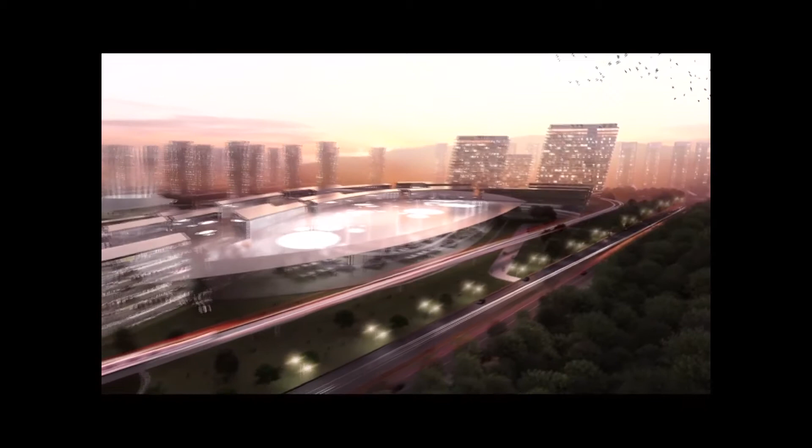All the roofs, in fact, are solar PV solar roofs. And then we get to zoom out and see the end of it here.

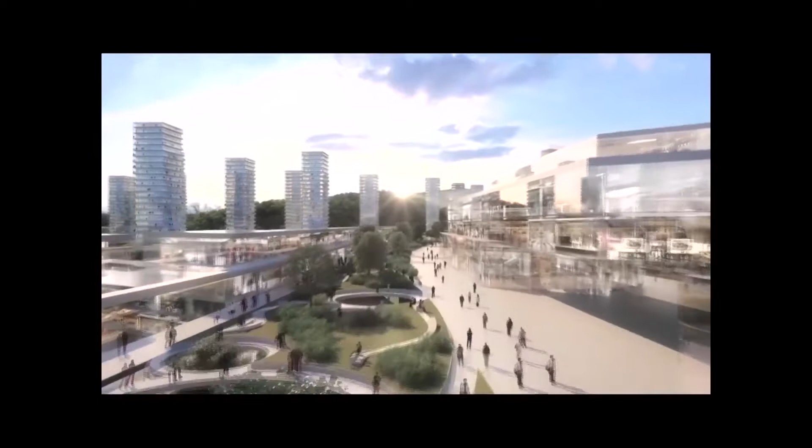And now we're actually going through the retail zone, and you can see how much of this has been brought in and out. The incorporation of so much parkland creates a very different atmosphere for the quality of life and the quality of space here, in terms of producing, I think, a very human place for China.

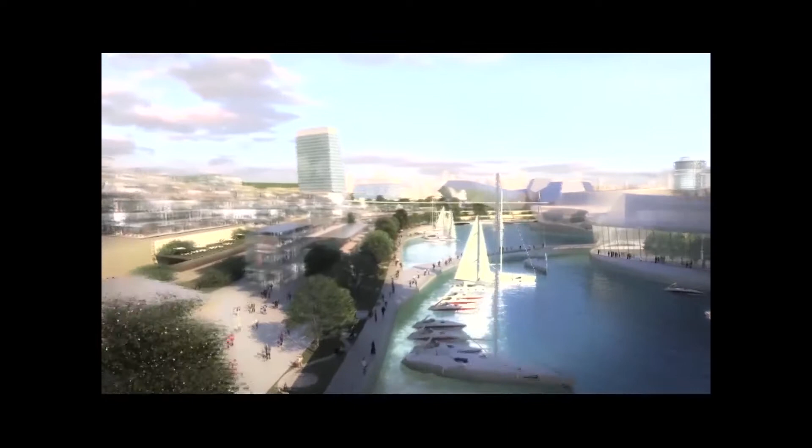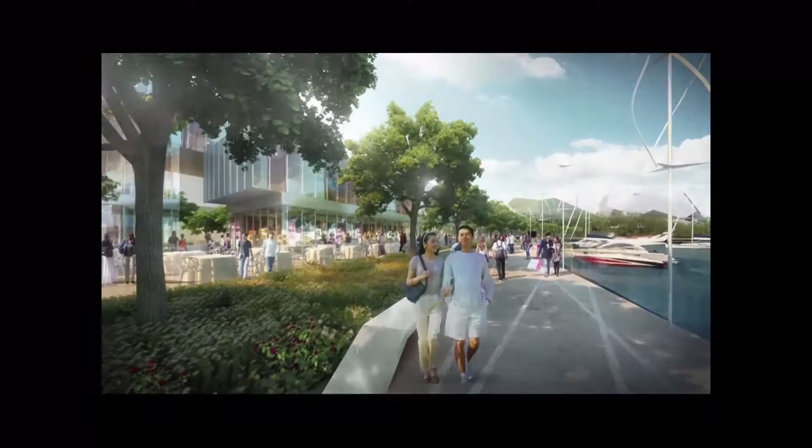And here we are down at the marina, and now you can see also the wind aspects for picking up energy wherever we can throughout the entire project. Now we see the marina and the kind of recreation hub of the city. This is one of the hotels that they're building now.

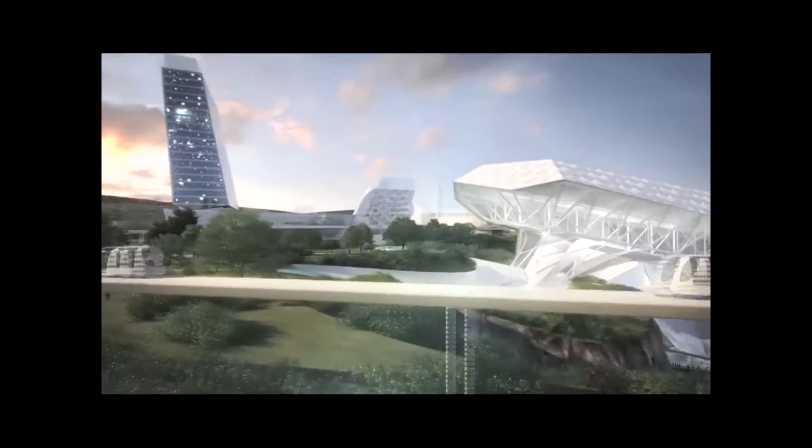And then this is a recreation park here in this old salt mining pit that goes down into that space and produces a series of museums and gathering places. That's the sense of place. And finally, as we zoom out, we see the quality.

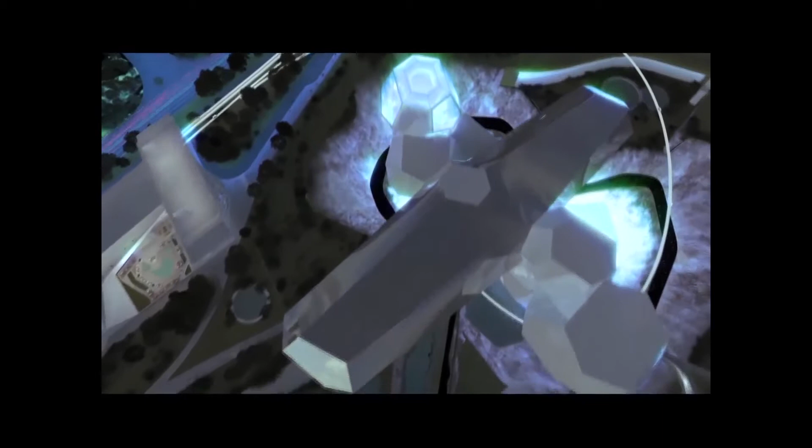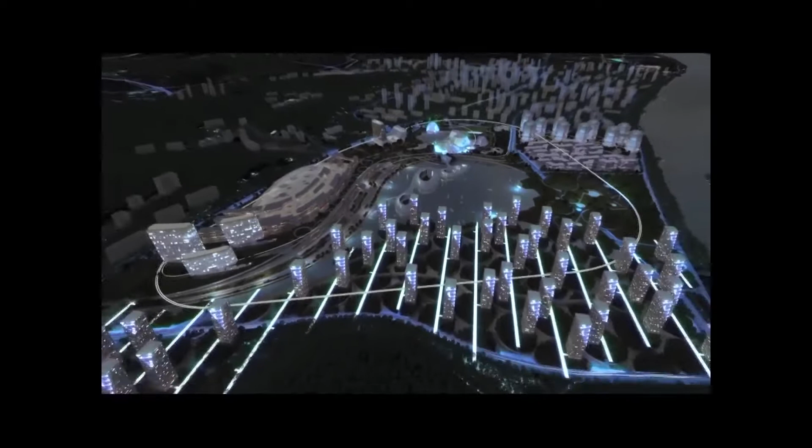The interesting thing about this whole story is that when we finished designing this, we were quite happy. We went back to New York with our whole team. A lot of our team was from Silicon Valley and California as well. We got a call two or three weeks, maybe four weeks, after we finished the proposal, and we were told that the boss, the man in charge, loved the project. It was really beautiful, but he didn't think it looked like a city, and cities should look like cities. I said, what does a city look like? And he said, Chicago. I said, okay, we give up.